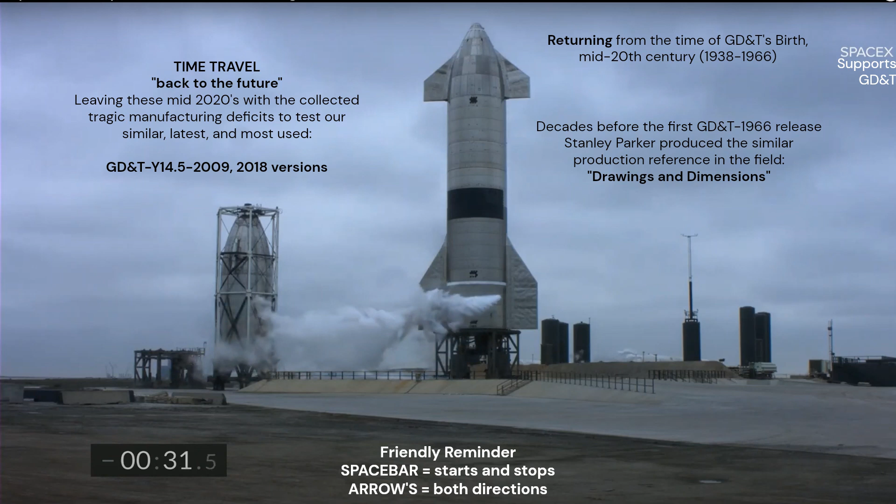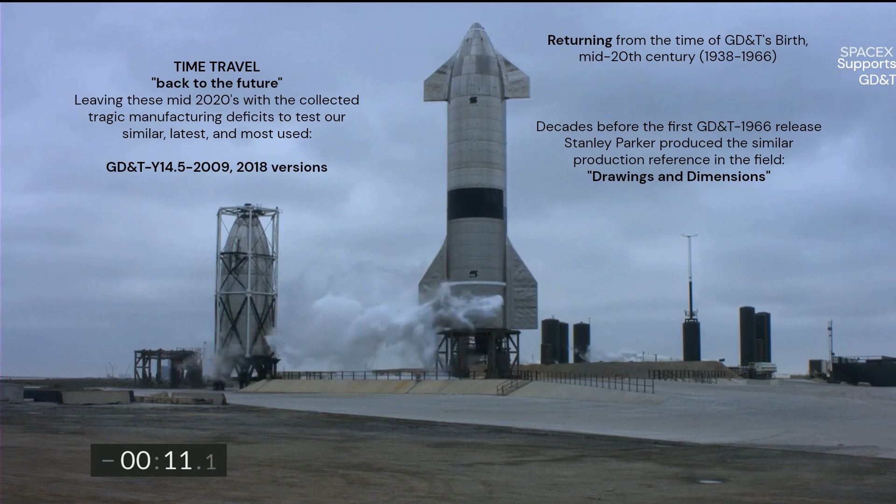Welcome aboard. We are time traveling back to the future from the time of GD&T's birth in this mid-20th century period of prosperity. In contrast with prosperity, there were many deaths due to ongoing manufacturing failures. Thankfully, Stanley Parker throughout this mid-20th century period minimized these deficits with his published drawings and dimensions that decreased the recurring failures. His intellectual property was the well-known reference in the field, which ignited and will eventually become part of

GD&T. Please excuse the excess noise, we are preparing to launch.

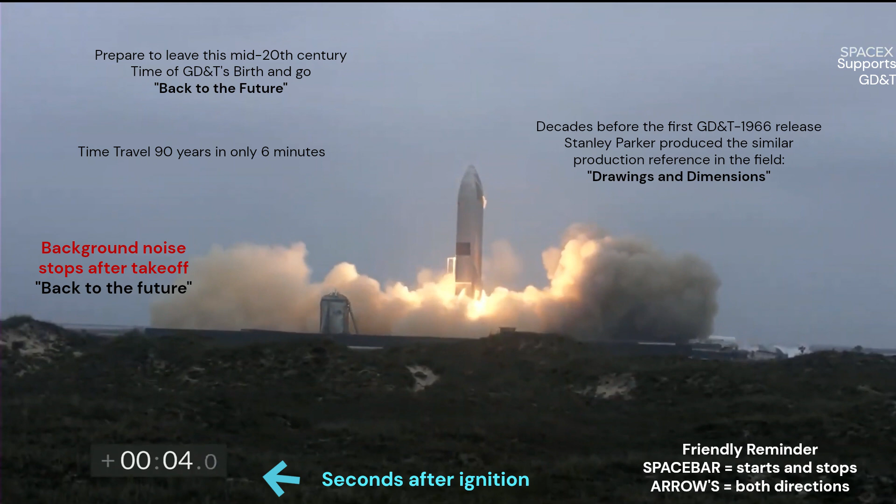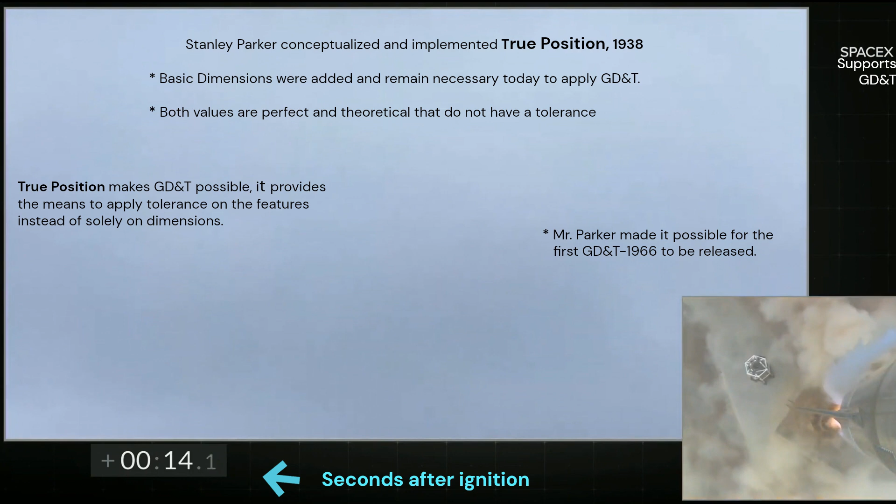GD&T exists today with decades of Stanley Parker's intellectual property. During this time, he published solutions to the tragic manufacturing deficits causing many resultant deaths. His contribution of true position makes GD&T possible, and a decade later the U.S. military contributed Rule No. 1, and all these resources would be used to establish the first GD&T standard released in

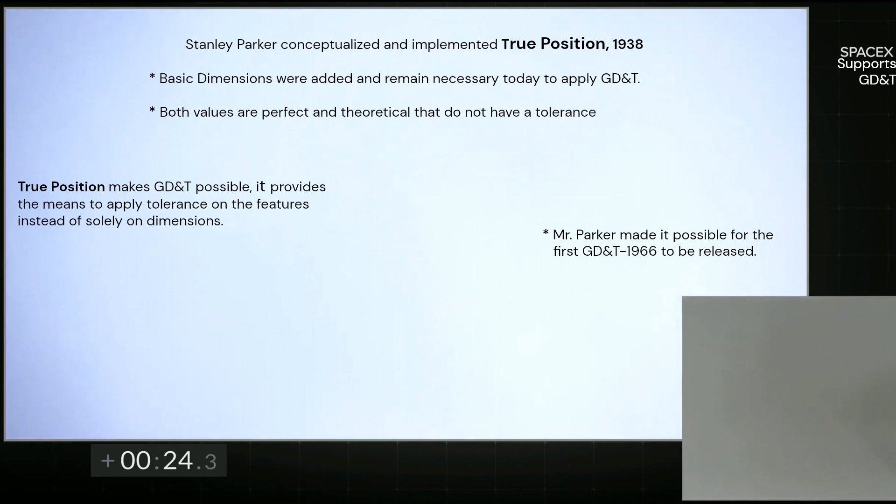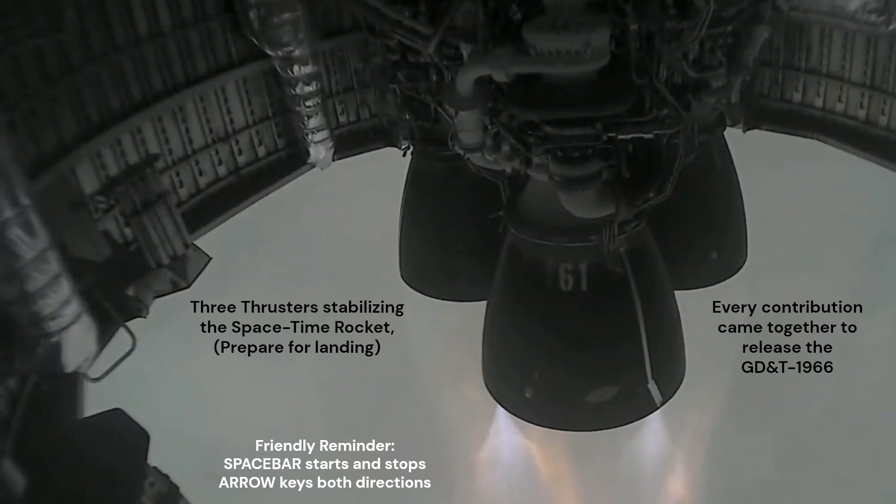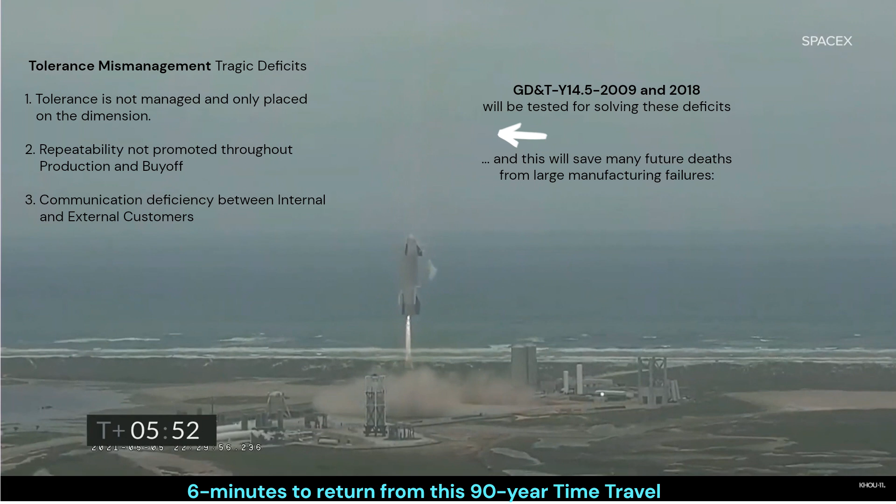1966. We are prepared to go back to the future with the collected tragic deficits to learn how our current 2009 and 2018 versions of GD&T Y14.5 handle these deficits. After 60 years of revisions and 90 years after Stanley Parker's initial documented contribution, Stanley Parker continued his work for more than 2 decades after 1938 when he continued to improve on his already great contribution by materializing his essential true position and design intent processes.

We are now landing back to the future in the mid 2020s with the tragic manufacturing deficits. Hope you had a good journey and please watch your step when exiting.